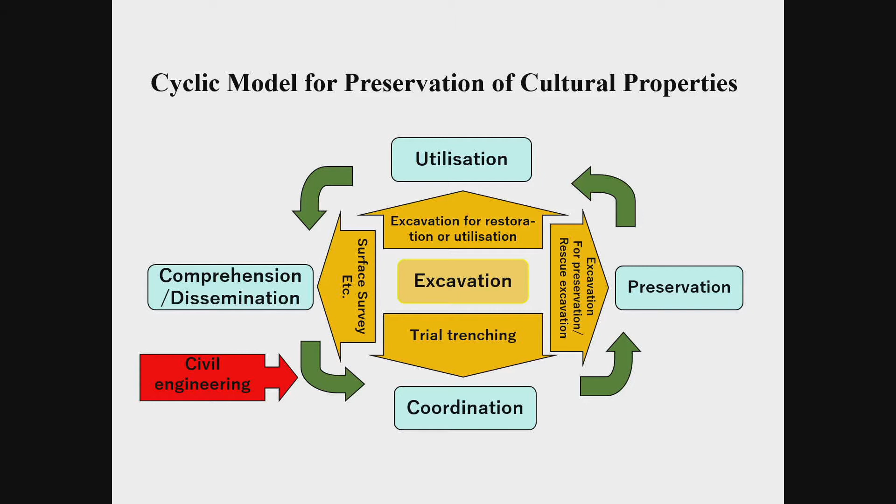In the previous lecture, Mr. Fuji explained 4 administrative stages of buried cultural properties protection: comprehension and dissemination of buried cultural properties, coordination between the protection and development project, excavation research, and preservation and utilization based on research results. In my lecture, I would like to introduce Japanese examples for the 4th topic, which is maintenance improvement and utilization of cultural properties while keeping their preservation in mind.

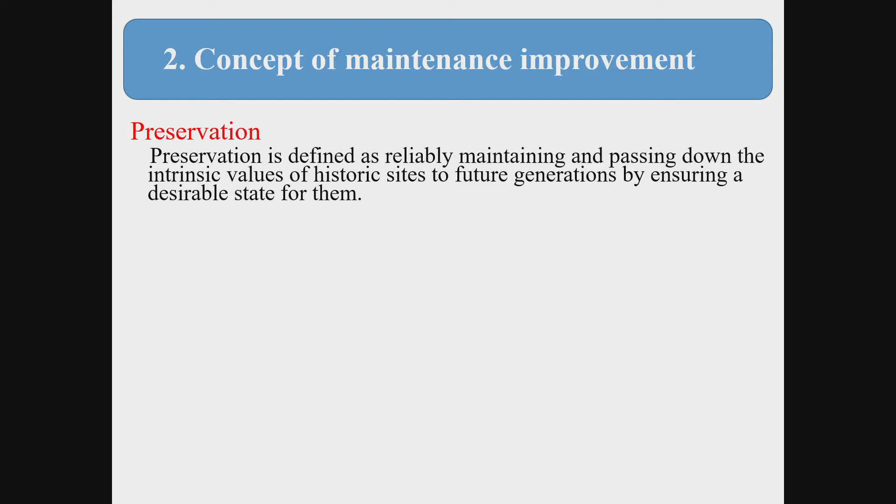I will now begin by discussing maintenance improvement pursuant to the law for the protection of cultural properties. One may say that the law simply stipulates two major issues. One is preservation, defined as reliably maintaining and passing down the intrinsic values of historic sites, including stone walls and buildings of castles, or buried archaeological features, to future generations by ensuring a desirable state for them. The other issue is utilization, defined as being that people in the community enjoy the value of historic sites and properly utilize them in our modern society.

Furthermore, the law emphasizes that it is important to achieve a desirable state of utilization depending on the nature of the value, as well as to actively and freely search for aspects of such attractive utilization. Such an approach may revitalize local communities. In many cases, historic sites are regarded as core elements of tourism and regional revitalization. In addition, they are used for educational programs.

Maintenance improvement is the necessary work to implement the preservation and utilization I have mentioned. However, in the law for the protection of cultural properties, there is no clause explicitly describing maintenance improvement.

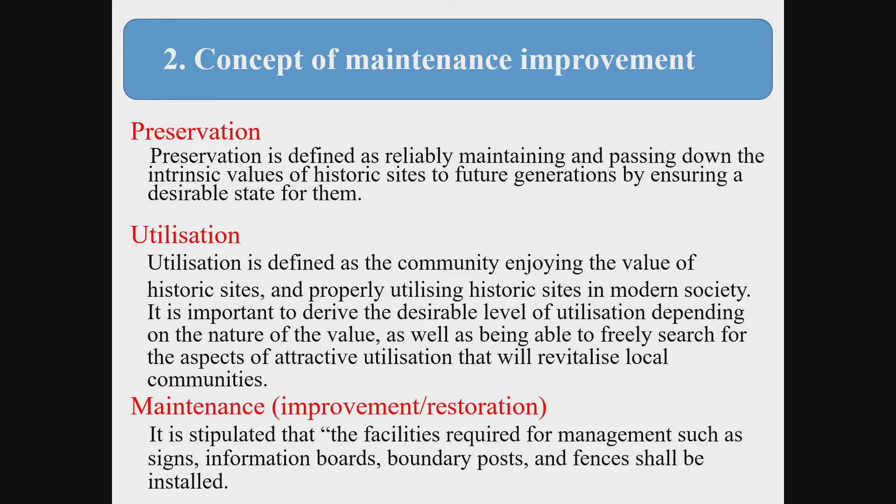Then, how should we carry out such maintenance improvement? The maintenance improvement of historic sites is a methodology to harmonize the contrary elements of preservation and utilization. Therefore, it is quite important for the implementation of maintenance improvement projects to clarify the purpose of the projects by dividing them into two categories, as shown in the slide: one is for preservation, another for utilization.

Maintenance improvement projects aiming at preservation include: 1. Installation of signs, information boards, boundary posts, etc., as stipulated by the law. 2. Maintenance-oriented measures. And 3. Recovery from damage caused by natural degradation or disasters.

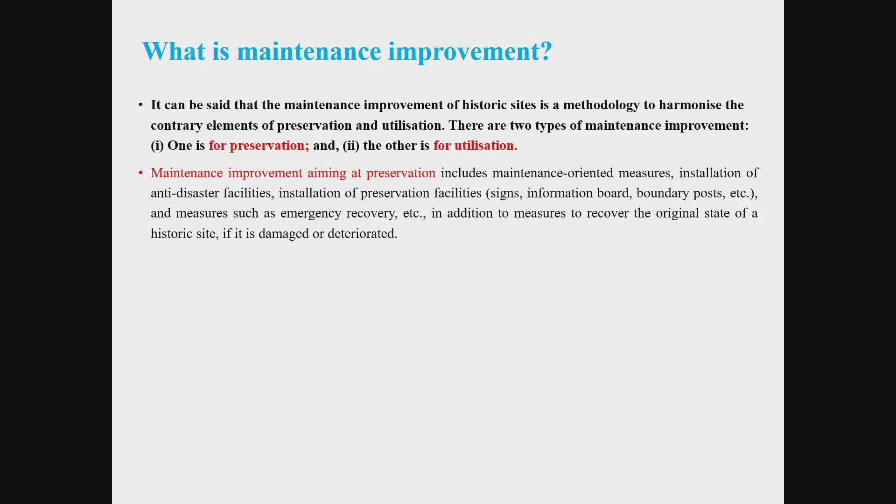On the other hand, maintenance improvement projects aiming at utilization include the categories shown in the slide. Typical cases of such works are on-site display to deepen visitors' understanding of a historic site, three-dimensional and two-dimensional reproductions, guidance facilities, etc. I will explain about such maintenance improvement later through actual examples. In any case, I am sure that the creation of various plans is the most important in implementing maintenance improvement.

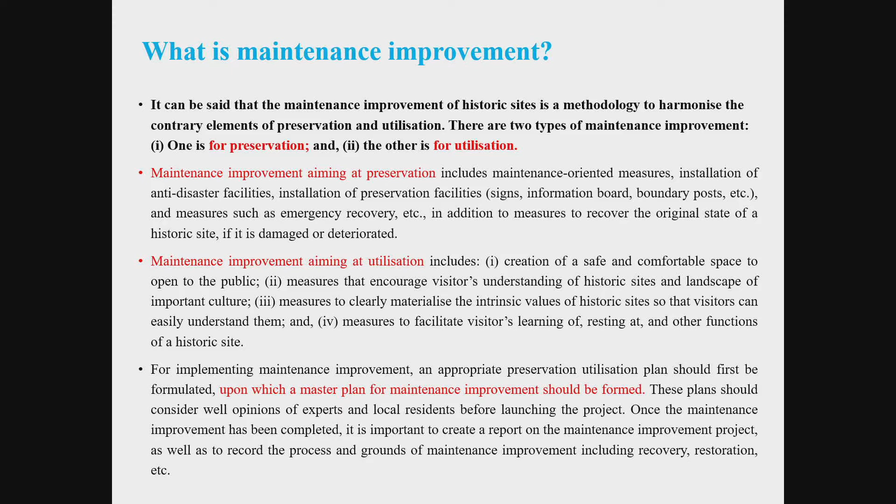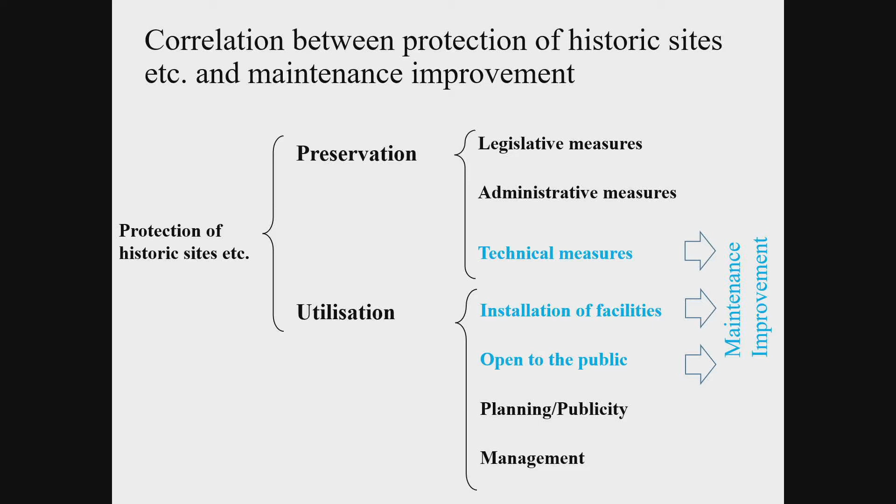This diagram shows the correlation between preservation and utilization of historic sites. Protection of cultural properties has these two aspects. As this slide shows, technical measures for preservation and installation of facilities for utilization, including public opening, are categorized in the maintenance improvement. As I mentioned earlier, maintenance improvement is the work to bridge between preservation and utilization.

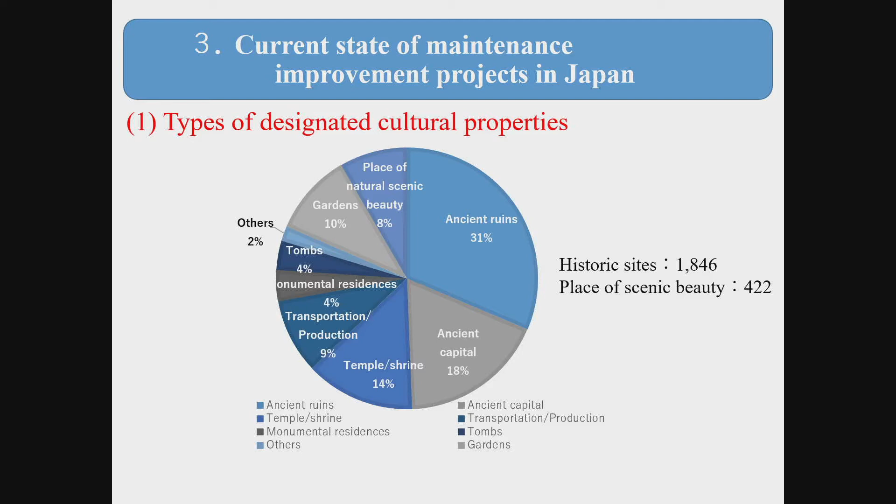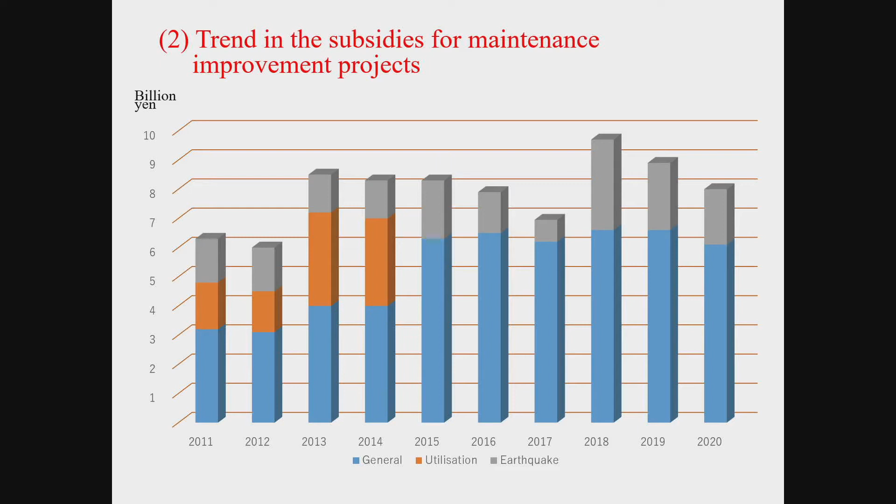This graph shows the status of maintenance improvement depending on types and the number of projects undertaken over the past year. As you see, most of the designated cultural properties for which maintenance improvement has been implemented are ancient cities, castle-related projects, the second bar from the left. In terms of numbers, ancient ruins constitutes the largest number, and castle-related sites are the second. However, for castle-related sites, maintenance improvement has been implemented about 3 times more than ancient ruins.

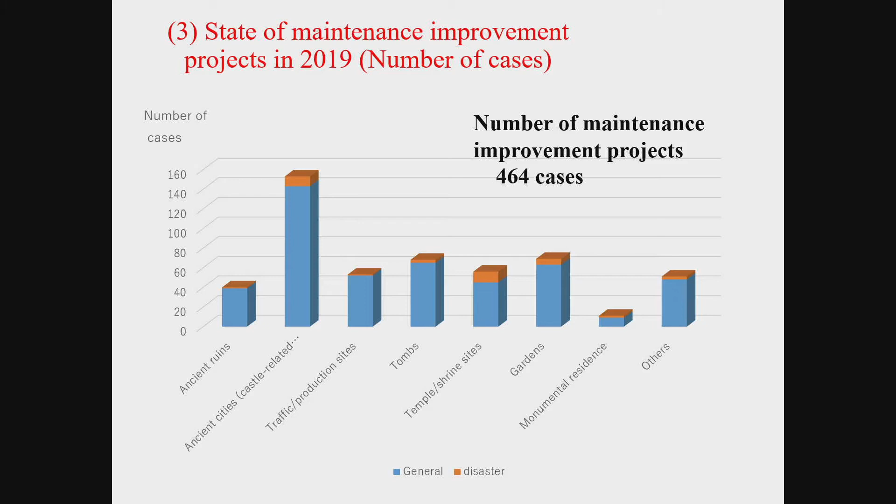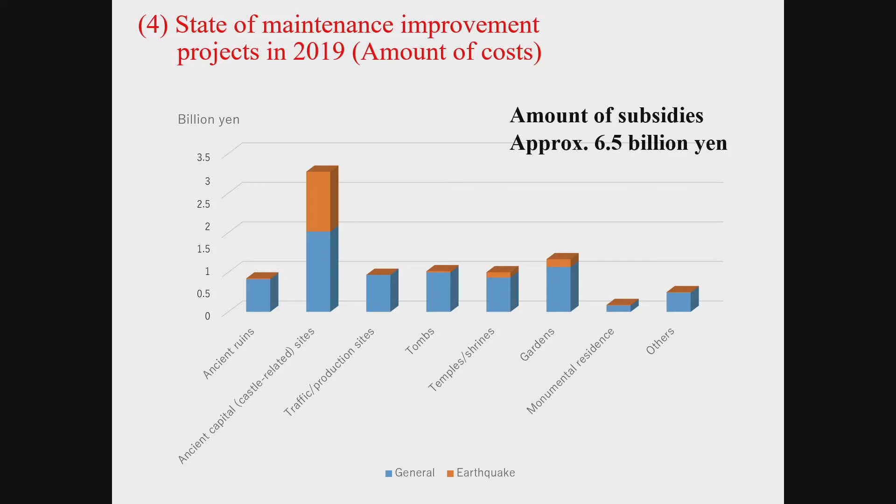In addition, I will compare the project cost of each site. Here as well, you can see that castle-related projects are by far the most numerous. Nearly half of the total costs have been paid for castle-related projects, meaning the cost per project is high. Furthermore, as Japanese people generally attach a high importance to castle sites for many different reasons, there is a general tendency towards generous subsidization with a large amount of money nationwide.

Now, I will talk about the process flow until the implementation of maintenance improvement for a nationally designated historic site occurs.

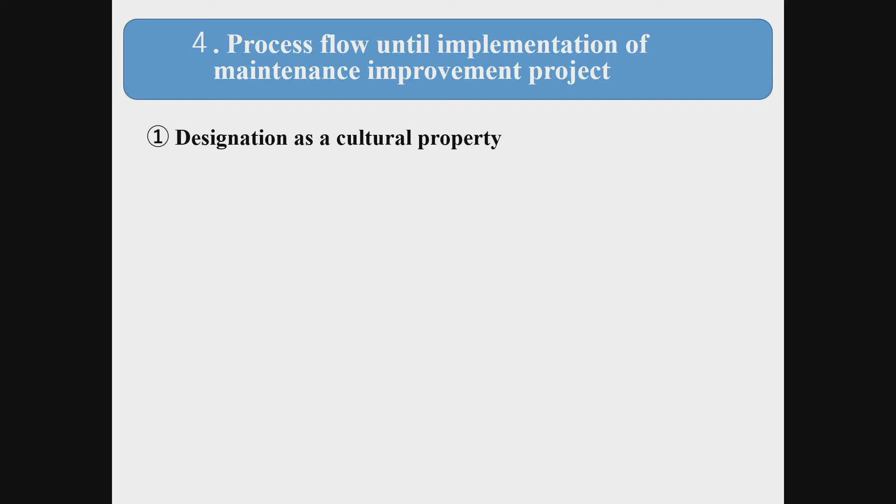First of all, the Preservation and Utilization Plan is formulated. The extent to which the alteration of current status is acceptable gives great influence over the whole maintenance improvement project. After the formulation of the Preservation Utilization Plan, the current state and problems of the subject cultural property should be understood to develop the master plan for maintenance improvement.

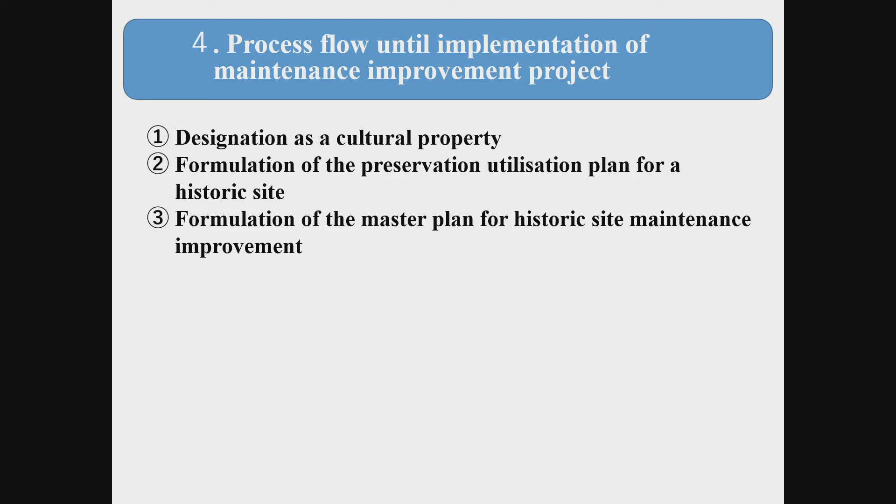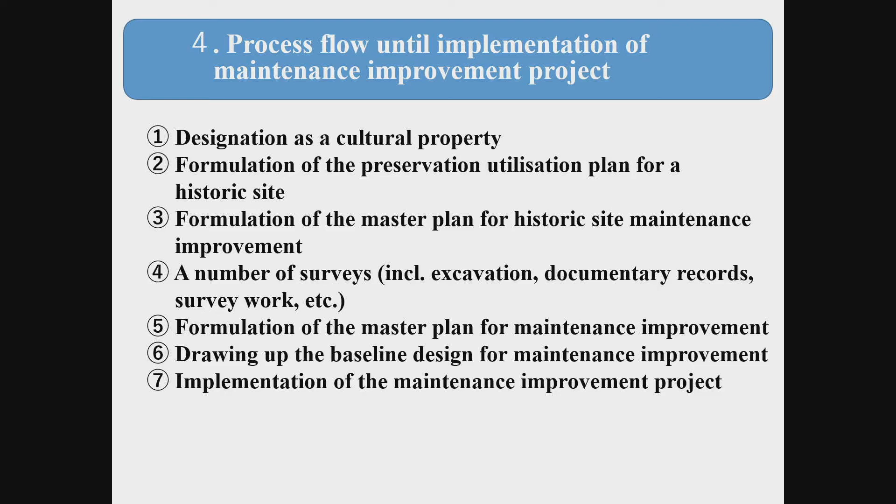After the plan is settled, a range of surveys should be carried out for implementing the plan. Based on the results of these surveys, the baseline design should be created, and following the creation of the working drawings, the maintenance improvement project will begin.

First, process flow and purpose of plan formulation. In particular, the purpose should be clearly expressed.

Second, existing conditions of the project site. The description should cover a slightly wider range than that of the project site, because it is presumably necessary to understand the surrounding environment, not limited to the area of the site itself.

Third, describe the investigation result and issues pertinent to the historic site. Fourth, once the existing conditions of the site are understood, the basic policy for maintenance improvement should be established.

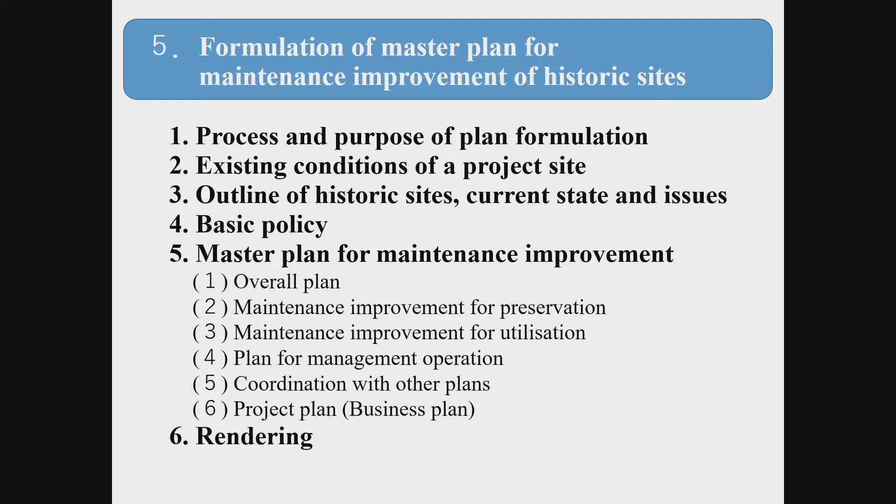Finally, it is recommended to create a rendering to provide a concrete image at the completion.

The next point concerns the subsidy from the national government to support maintenance improvement projects. As I mentioned in the explanation of the law, the national government may grant a subsidy to financially support the maintenance improvement of nationally designated historic sites.

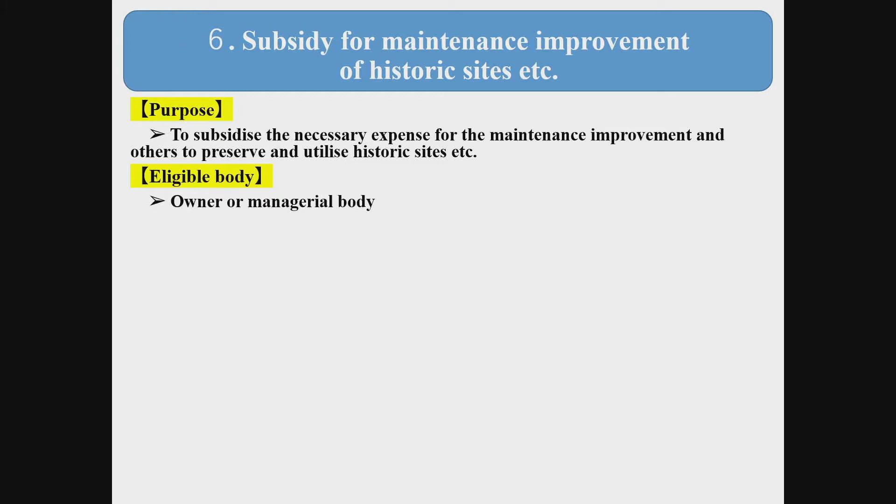The owner or managerial body can apply for this subsidy. The amount of the subsidy is 50% of the expense in principle, and eligible projects are restoration, environment improvement, facilities for utilization, disaster recovery, and others, as listed in the slide.

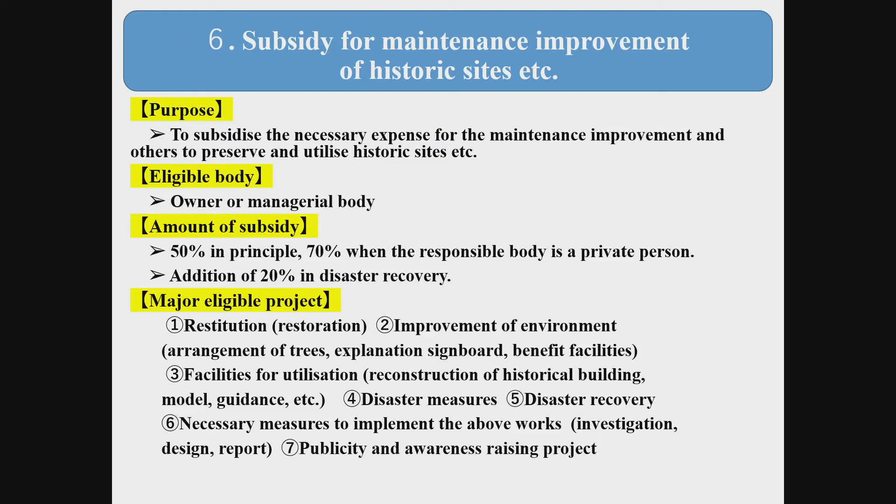This is a case example of before and after maintenance improvement. The site is a tomb more than 1,000 years old, and so its original form had already collapsed. The master plan for maintenance improvement was established, aiming at representing the original appearance to deepen the understanding of the historic site. According to the plan, the mound covered with stones was reconstructed while preserving the remaining original. A replica of the stone chamber was also constructed for visitors to experience the inner structure.

In the second session of my lecture, I would like to show many other examples of maintenance improvement implemented as nationally subsidized projects.

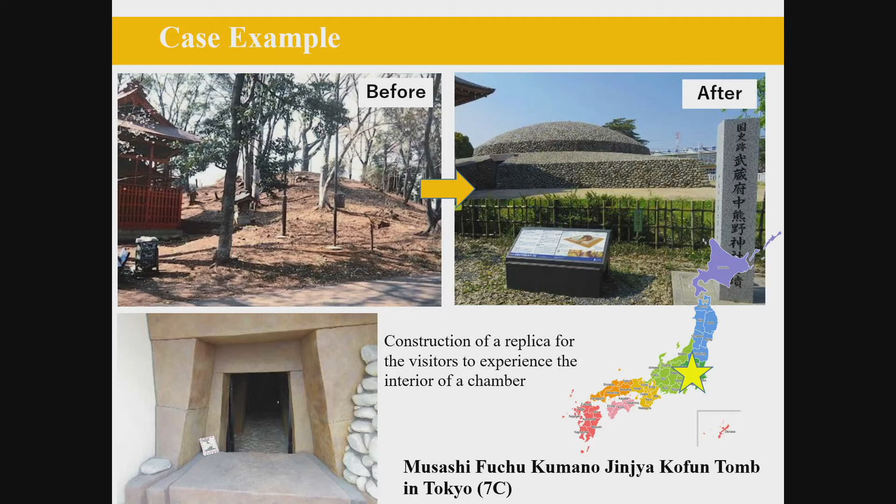This is the second session of my lecture. I'm going to divide session 2 into 2 parts. Part 1 provides examples of case studies of maintenance improvement for preservation of sites, and utilization-oriented cases are introduced in Part 2.

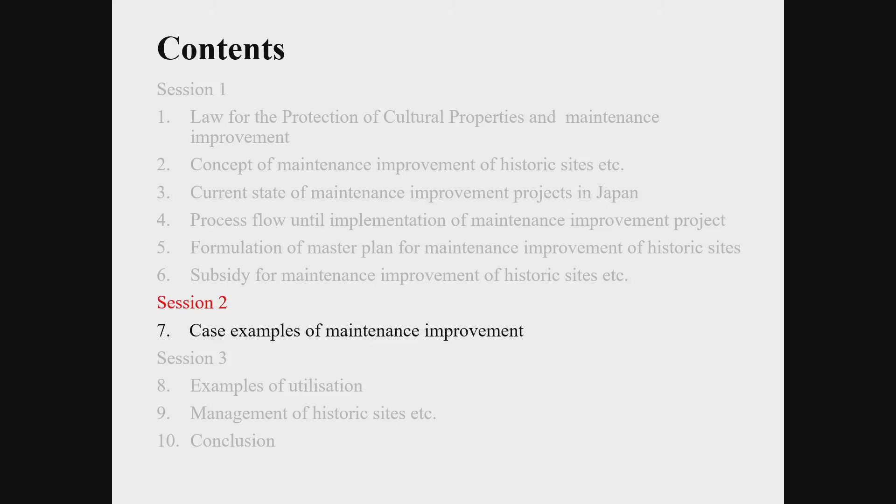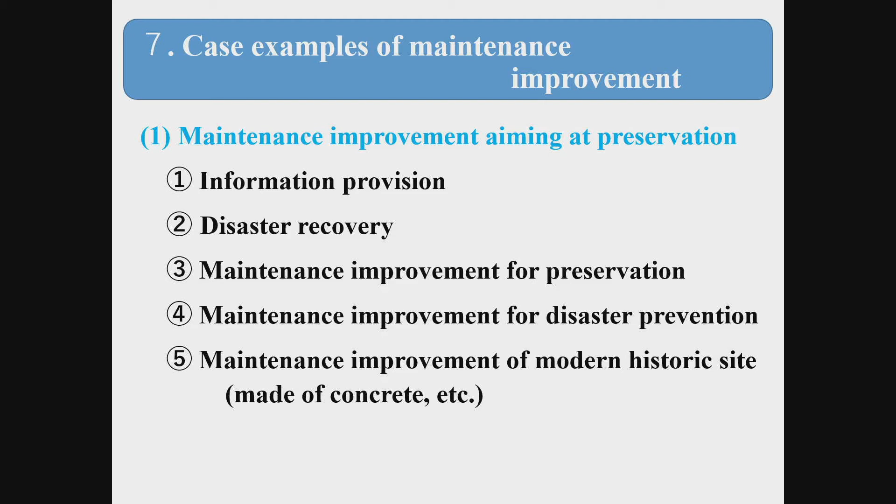Let me start with the examples of case studies of maintenance improvement aiming at preservation. 5 major types of maintenance improvement for preservation are listed here. I will show you the cases for each of the types from the next slide.

This slide shows a boundary post related to number 1, information provision. The boundary post is extremely important as an on-the-spot mark to indicate the designation range of a historic site. The law for the protection of cultural properties mandates their installation and prescribes size. The material should be stone.

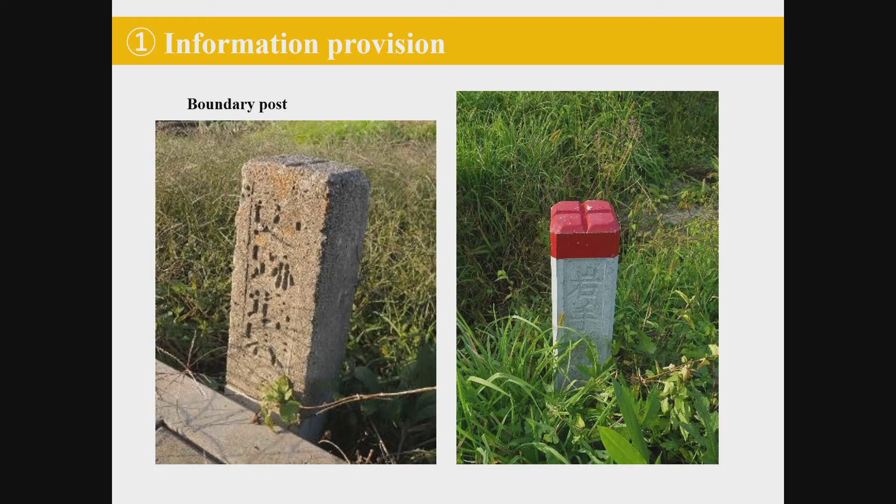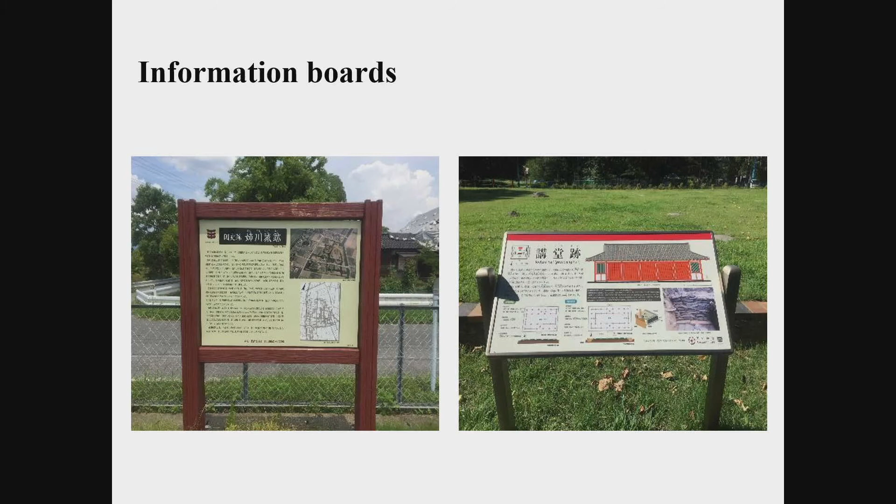Here is an information board to inscribe the characteristics, range, and other items of a historic site. This must also be installed in compliance with the law for the protection of cultural properties. As is the case with signs, the shape is free to select. However, the contents of the description are prescribed.

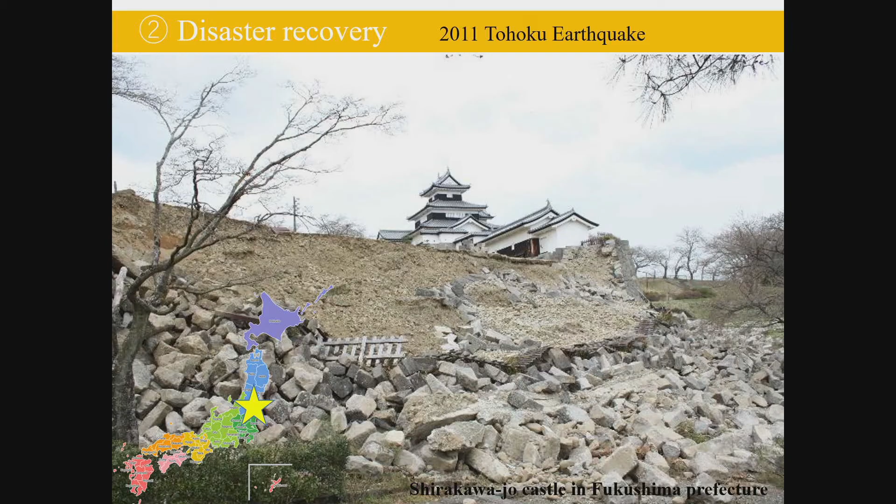This is the ongoing recovery work of the stone walls. All fallen stones are checked to confirm their original location within the stone wall, and to determine whether or not they can be reused again as stone materials. Further, while carrying out the excavation and surveys, the recovery work proceeded based on the original masonry methods used 400 years ago.

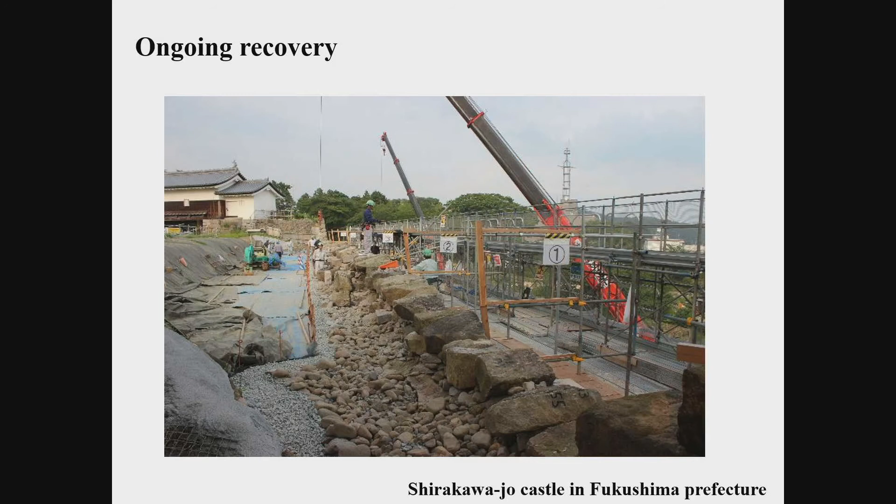In principle, the stone walls are restored in the traditional way, using the original methods. However, modern construction techniques are partially employed to secure safety and future earthquake resistance. There are pros and cons to the introduction of modern techniques, but the decision was made after a thorough examination of all the issues.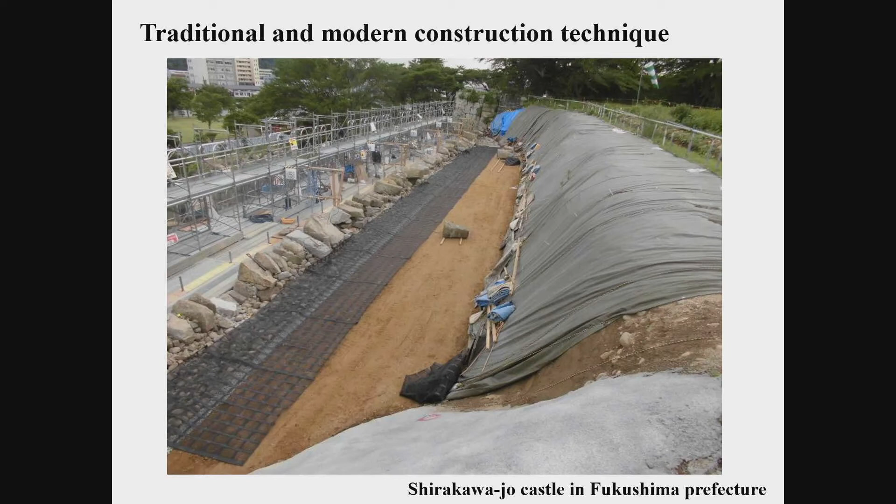This photo shows the restored stone walls of Shirakawa-jo Castle. The stones appearing slightly whitish-grey are those newly installed. Considering the use rate of new stones, quite a number of old stones from before the earthquake have been reused.

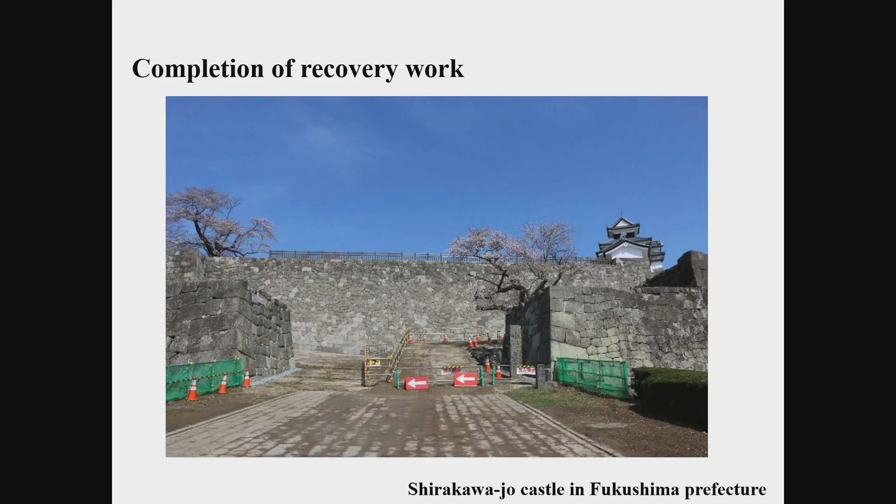This photo was taken when the castle was reopened to the public after the recovery work. Many citizens and castle fans visited. As I mentioned earlier regarding the number of cases and costs of maintenance improvement, the charm and existence of castles are so significant for Japanese people that the completion of this recovery project became a symbol of recovery from the earthquake.

The following slides show the damage caused by the earthquakes that occurred in Kumamoto Prefecture in 2016. As Japan is a country of frequent earthquakes, any regions or cities within Japan could be attacked by earthquakes. Furthermore, it occurs suddenly. As the Kumamoto earthquakes were epicentral earthquakes, they caused great damage to cultural properties and changed landforms extensively. The places shown in these photos are near the epicenter, at which you can see the ground has sunk about 2 meters below its previous level.

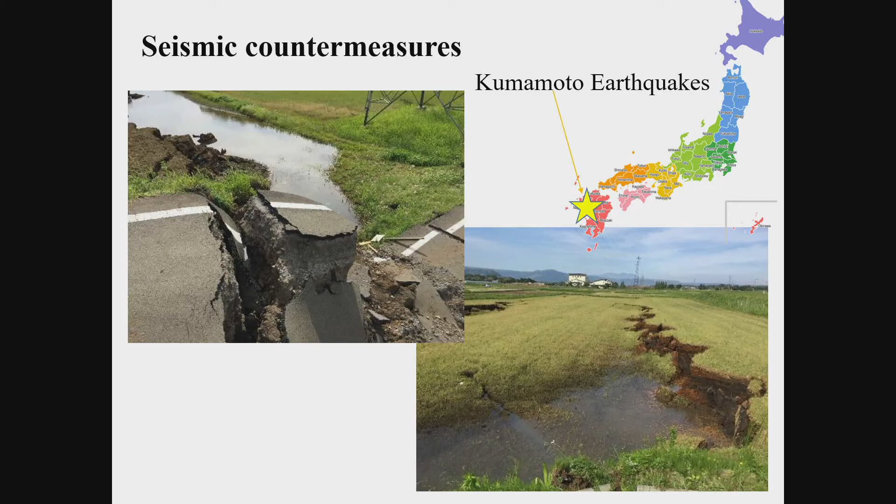These photos show Kumamoto-jo Castle, a symbol of Kumamoto Prefecture after the earthquakes. This castle suffered the heaviest damage. Many buildings and stone walls supporting the buildings were also damaged.

At present, there are many issues to examine. For all that, collapsing buildings and structures need immediate practical measures. Accordingly, we have taken emergency measures for the time being. At this stage, it is important that firm maintenance improvement policies should be established before starting recovery works.

As you see, many stone walls have collapsed. As the damage is extremely heavy, the organizations concerned need to start with basic steps to first understand the existing conditions of the remains. They still have a long way to go to recover the masonry walls. Meanwhile, although there is a basic rule that a cultural property should be preserved using the original techniques, an argument over what to do about earthquake resistance is rising under this situation.

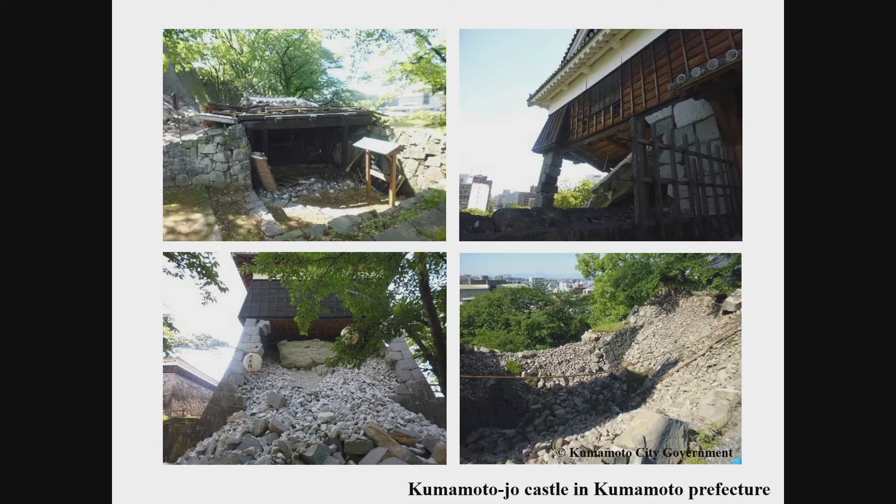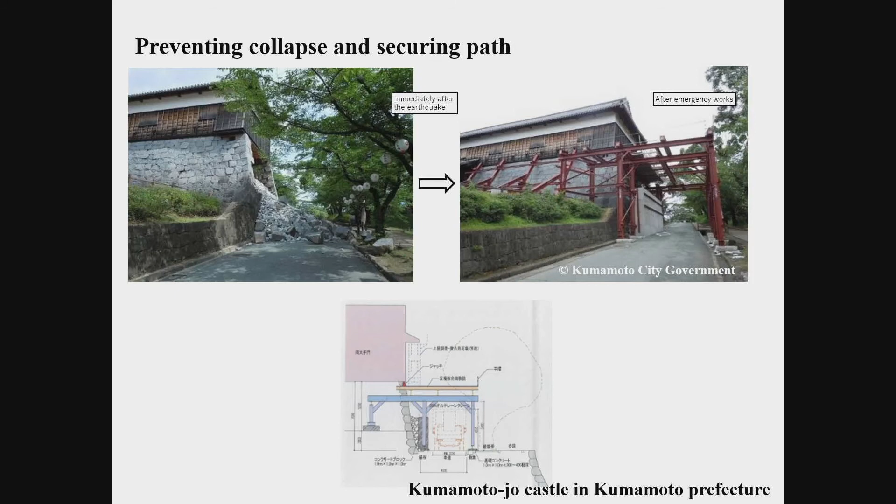This photo shows the recovery and repair work undertaken around the entrance. The iron framework is used for preventing the stone walls from collapsing, as well as securing safety for the path for construction vehicles.

This reconstructed building was in danger of collapse and was supported by scaffolding to prevent collapse. The building has since been temporarily dismantled, and the stone walls are being repaired first, while examinations and various recovery works are being conducted.

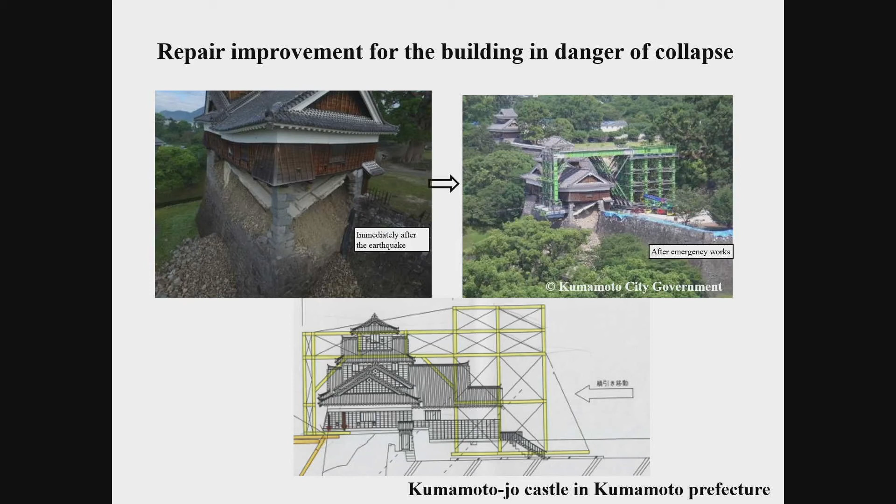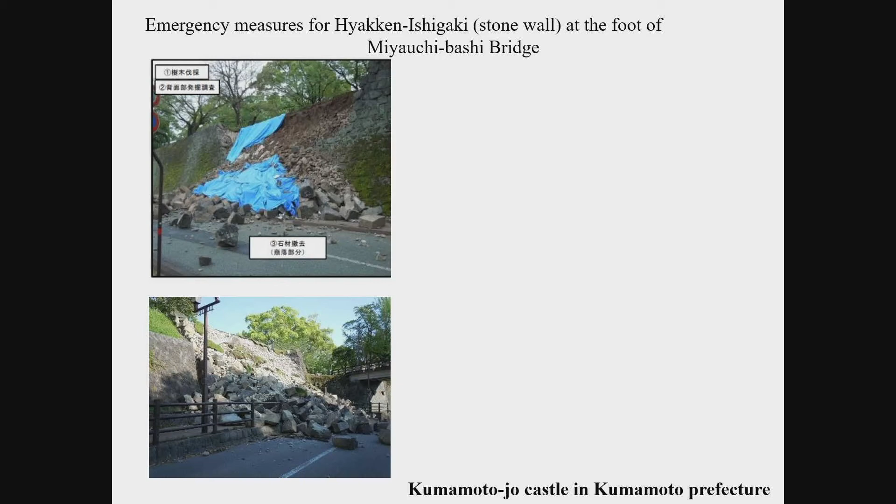This is a case of emergency measures. Many stone walls have collapsed, so full-scale recovery work is not available for the time being. The mortar spray was used for consolidation.

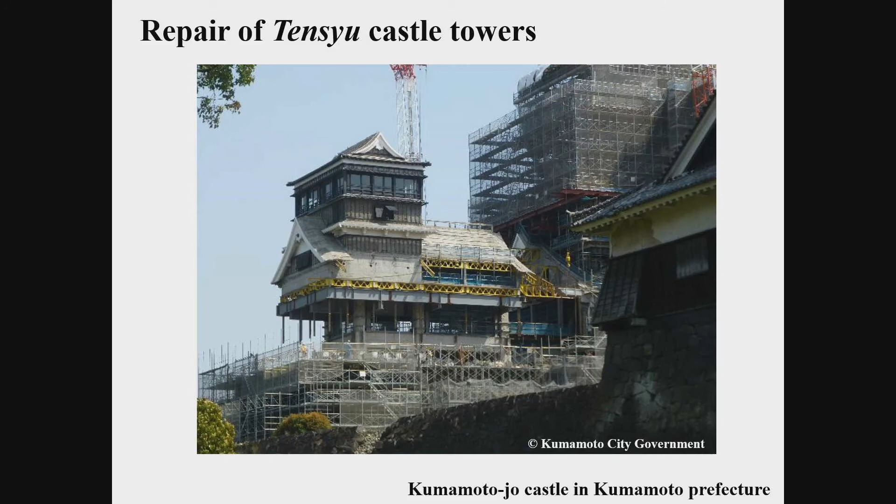This photo shows repair work for the large and small castle towers. Since these towers are reconstructed buildings, the base stone walls are independently structured from the towers, so the repair work is currently being separately undertaken for each of them.

Repair of the main castle tower has almost been completed. The present repair work is on a small keep on the left. Areas around the castle tower are starting to be opened to the public.

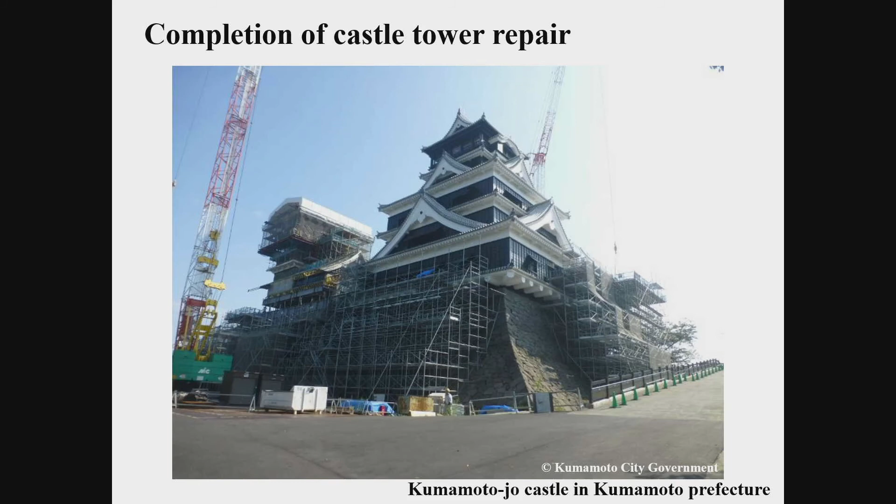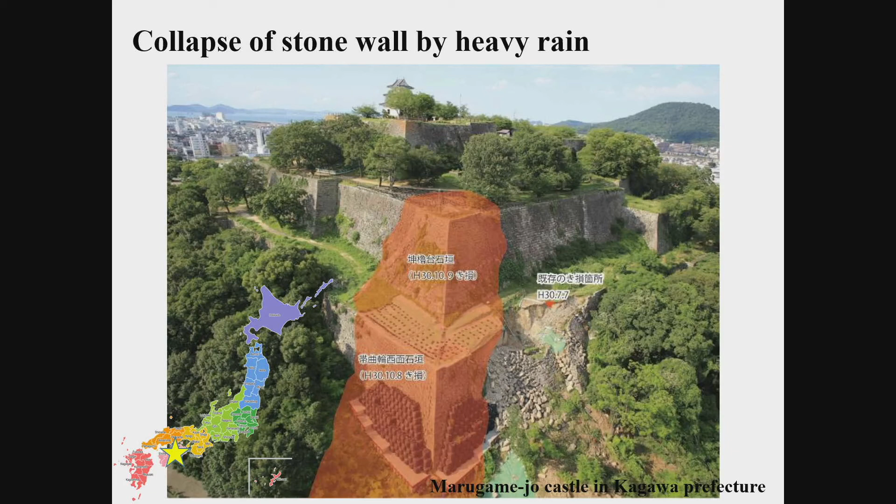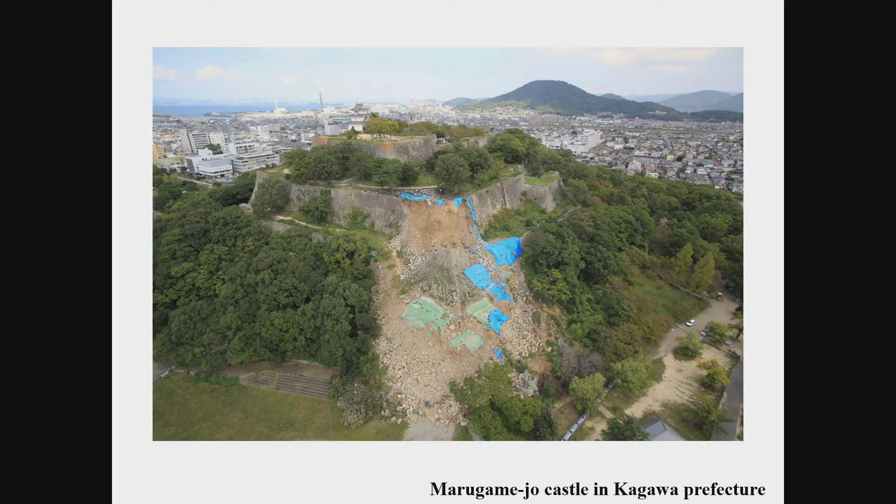This is a photo immediately after the collapse. You can see the corner of the upper stage of the stone wall has fallen down, keeping the stonework structure. It is observed that the collapse was caused by a landslide behind the stone wall structure after extraordinarily heavy rain.

Dismantlement of the stone wall is going on. Removed stones are checked one by one to sort them into those to be reused and those to be discarded. It will take several more years to complete recovery.

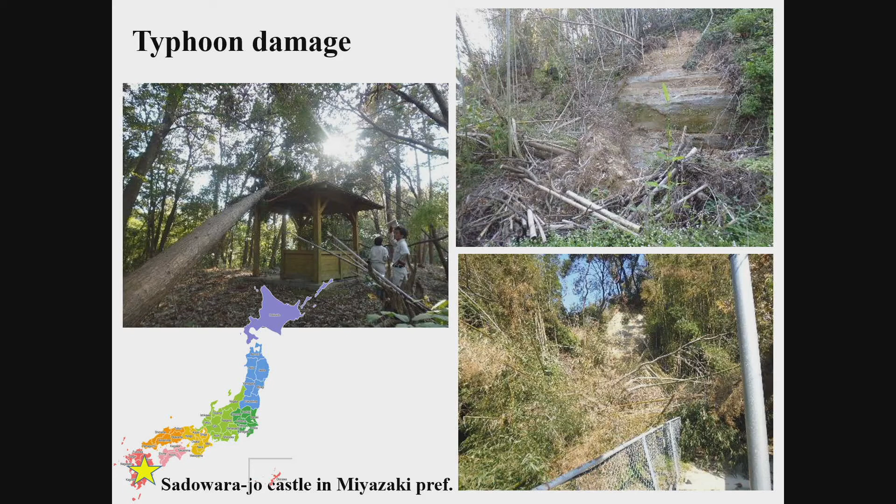Now I will show you the case of maintenance improvement for preservation. This is very close to that of disaster recovery presented earlier.

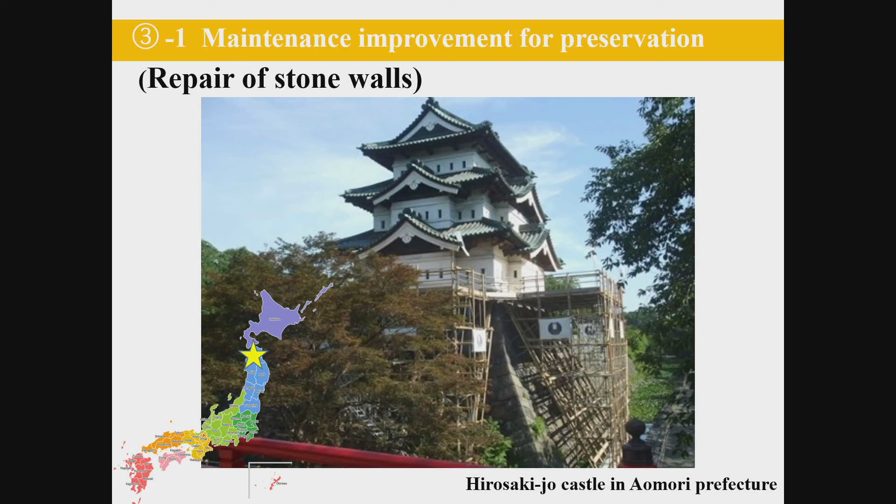The stone walls that support the castle tower, the central building, are being restored. For carrying out this restoration, the castle tower building built on the stone walls must be moved. I will explain about the operations undertaken to move the building.

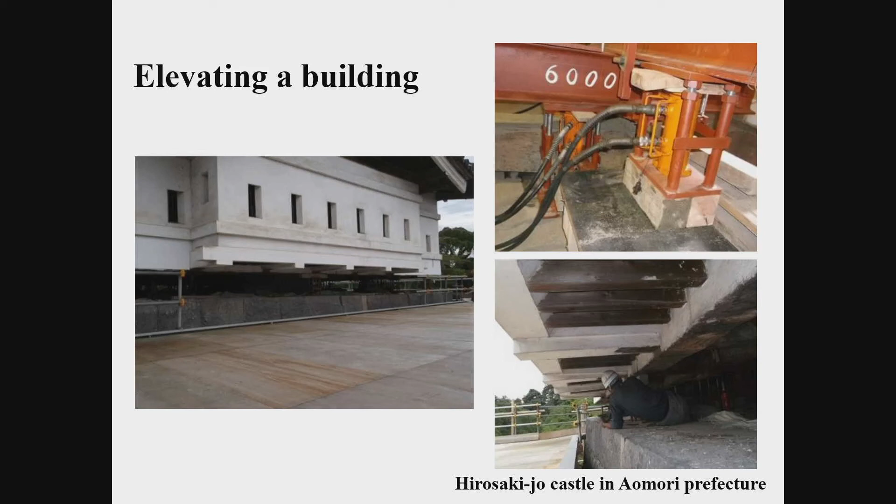In ages past, this operation was carried out by human power, but this time, modern machines shown in the upper right photo were used.

At this stage, rails are laid for moving the buildings. Before, wooden rail ties or rail sleepers were used, but this time, iron materials were used. However, despite the different materials, the basic method for moving it is the same.

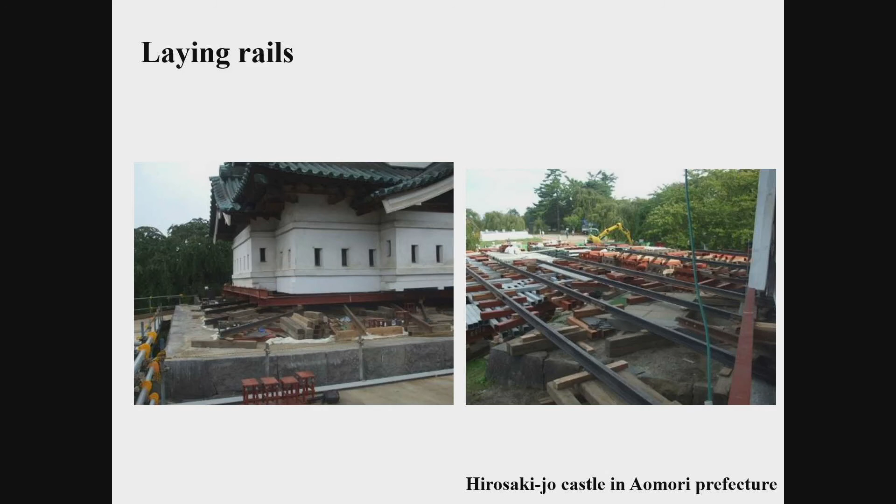These photos show the situation of the actual move of the castle tower. It would be far easier to move it using machines, but this project invited citizens to participate in the moving event. They successfully moved the building by human power, in the same way as in olden times.

Even though it was more or less like an attraction, I am sure the event was a very effective way for citizens to gain a deeper understanding of the historic site.

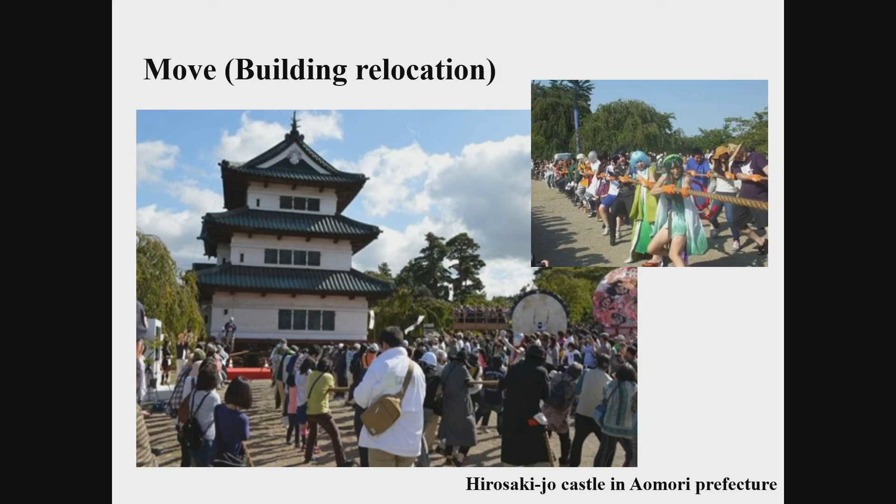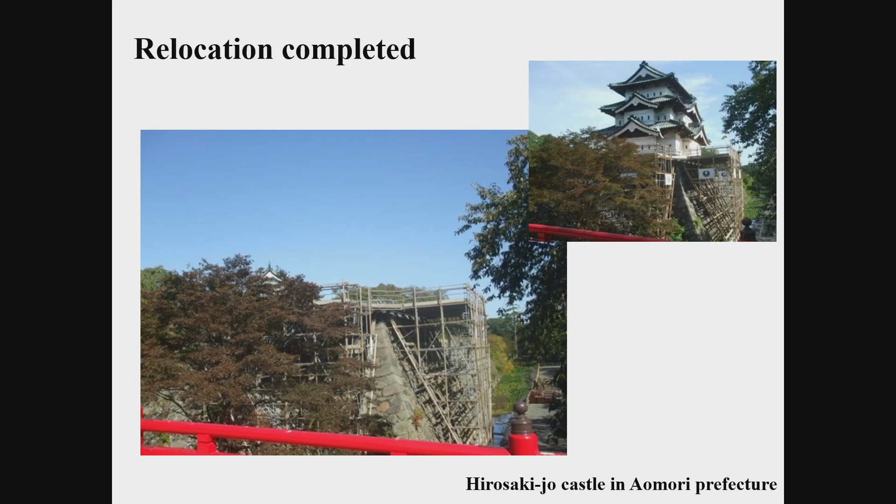This is the present appearance of the site. The building has been fully relocated, leaving the stone walls alone. From now on, the full-scale stone wall repair will begin.

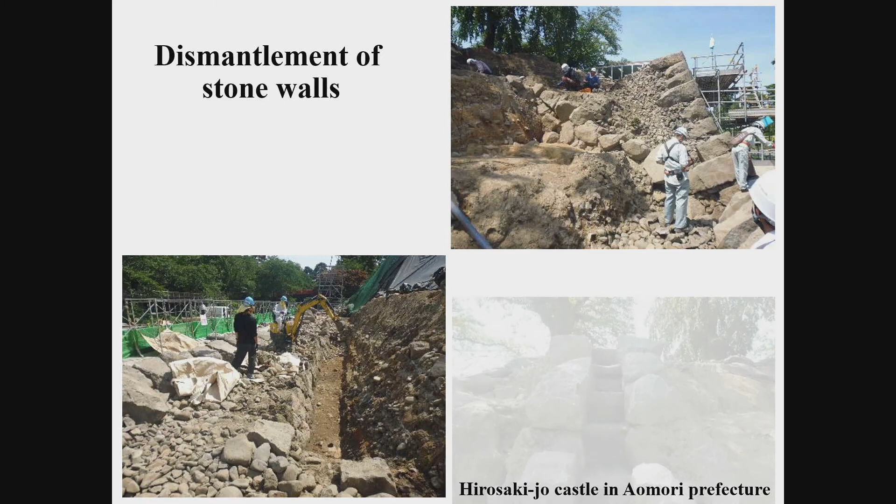These photos show the dismantlement of the stone wall. An archaeological excavation survey is carried out at the same time. Careful works and observation are required, since they provide important information on the inner structure to restore the walls.

Dismantlement of the stone walls of the castle tower foundation. The issue here is reinforcement of the foundations for earthquake resistance. As a country with frequent earthquakes, seismic reinforcement for cultural properties is required in Japan.

For the reinforcement, it is inevitable to destroy a part of the inner structure of stone walls. The experts are carefully examining the method.

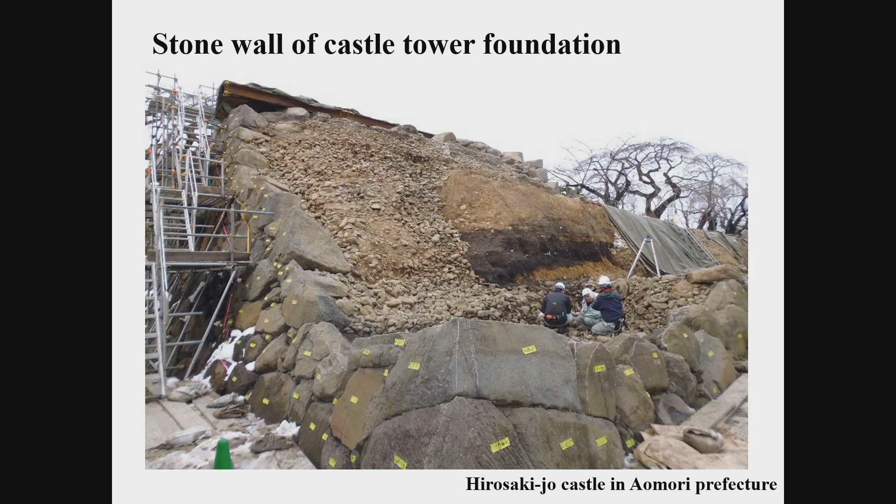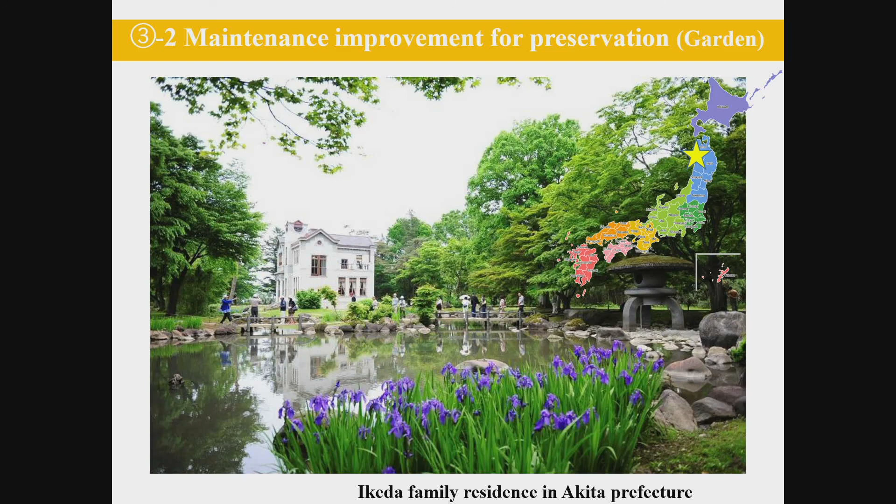This example is of maintenance improvement for a garden. The garden in the photo is that built by the former Ikeda family, a large landowner in Akita Prefecture. For this garden, maintenance improvement was undertaken to restore the original appearance of 100 years ago.

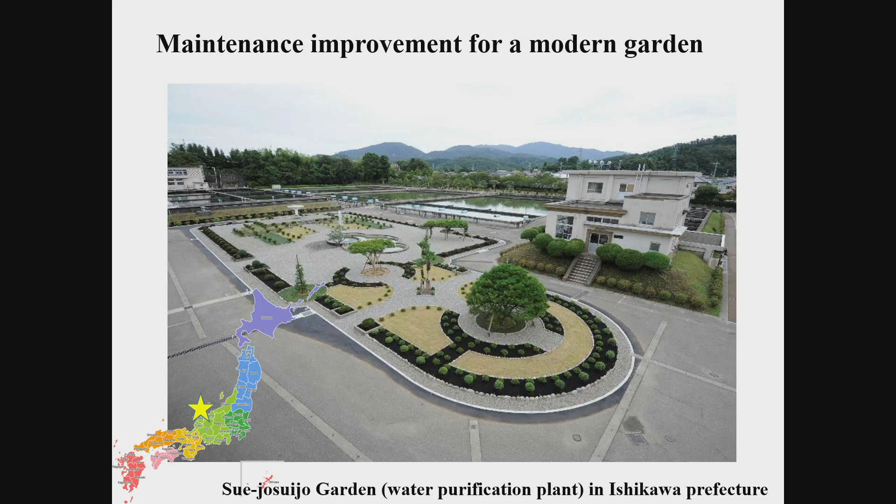This photo shows a comparatively new garden constructed in a public facility of a water purification plant in Kanazawa City, Ishikawa Prefecture. It is a Western-style garden, giving a completely different impression from Japanese traditional gardens.

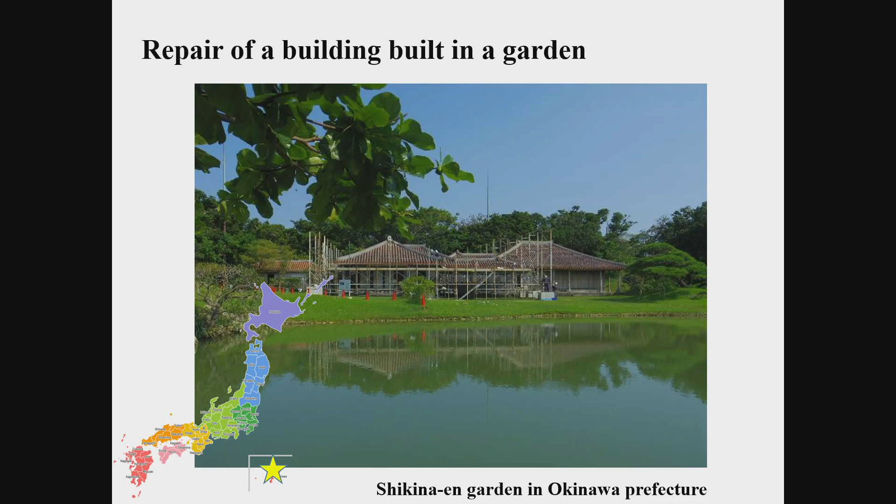This photo shows a garden in Okinawa Prefecture named Shikina-en, built 200 years ago in the villa of a king of the Ryukyu Kingdom. Maintenance improvement for the garden and repair of the building are being undertaken in parallel.

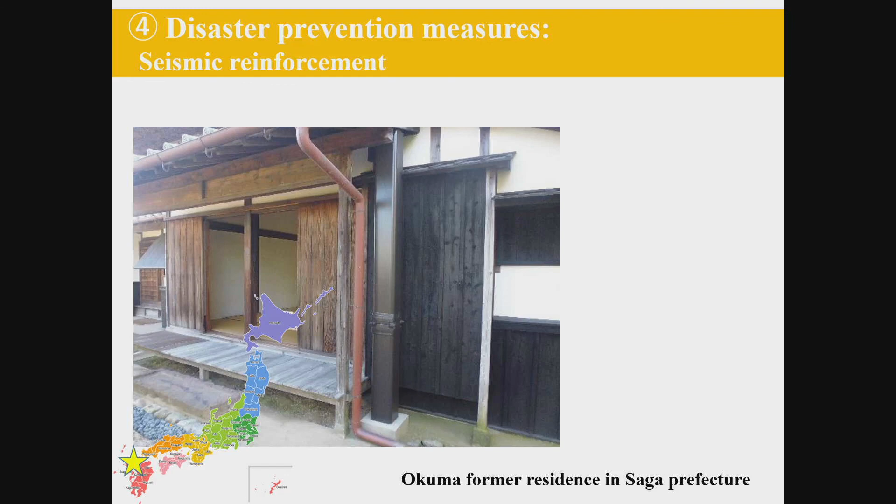This is an example of seismic reinforcement: an earthquake-resisting pillar. An earthquake-resisting pillar, marked with an arrow, is installed in an unnoticeable place and color.